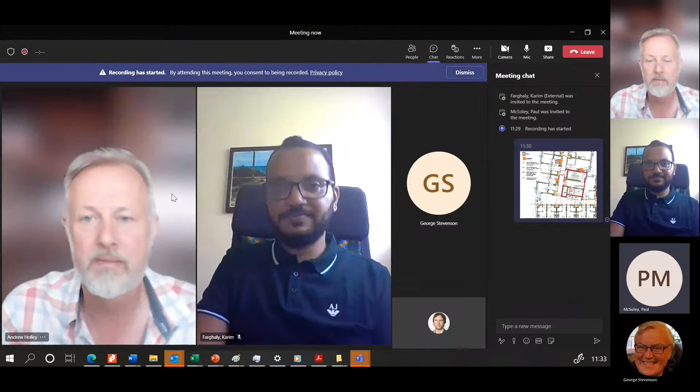Let's see if I can share my screen now, mate. Hold on, share out, screen 2. Okay, is that up? Yeah, I can see that now. Is it big enough on yours? Close the chat bit and have that instead. That's better, that's it, yeah. Otherwise, you can use your mouse controls to zoom in. If you use the scroll button and press control, you can zoom things in and out.

I can't make that any bigger because I've got a 50-inch TV. I've got a massive TV, but how big it is on your laptop, so not that big. The problem is you get pictures of people. Actually, if you get rid of the recording bar at the top, dismiss that, that makes everything a little bit bigger. Anyway, it's just about legible at this size for me.

I'm sorry about that, mate, I had to take a call there from my neighbour, so I apologise, he's a bit older than me. We've got people waiting in the lobby as well, they'll be coming in. Is that Debbie just arrived? Yeah, okay, yeah, it is. Sorry, I had to dash and do something.

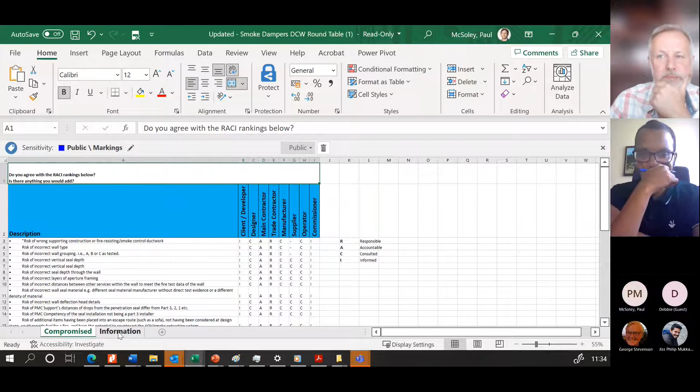No problems, mate. So George, you there? Yeah I am, okay, do you want what to do? The compromised all the information. No, ignore the compromise, that shouldn't have been in there. Yeah, no, that's fine, just the information. Okay, no problems at all.

So we're going to do smoke control, right? Smoke control dampers, not fire dampers, George, smoke control dampers, yeah? Or do you want to cover both? No, smoke control. Okay, so smoke control. So we're talking about this shaft, yeah? And I don't know if you remember from digital construction, what we said is that it's not going to be a natural shaft, it's going to be a mechanical shaft, right? This is what we're going to base it on, right?

So the first thing is, obviously, when you look at it, you say okay, so what is the material, what is the type? So who specifies the material of the smoke control system that sits in there, the dampers? Client, designer, main contractor, trade, manufacturer, supplier, operator. Do we tick all the ones that are relevant, George, or just the one who should be ultimately responsible? No, I think all of the ones who are likely to be providing it, that would be my suggestion. Yeah, for that reason. So, okay, so the type of system should be the designer. All agree with that?

Yeah, I mean, I don't know, but just so we know we haven't got a lot of time - is everyone familiar with what a smoke control damper is specified against? If you're not, I can show you in two seconds. I'm not, but I can find out.

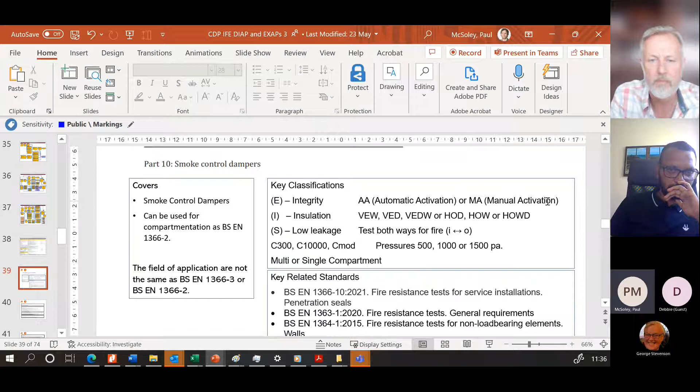So it's either an AA or an MA system. One has got an override control, so you can go automatic first and override it, or one's automatic only - no override control in any shape or fashion. They're tested both ways, fire inside, fire out, because the damper's asymmetrical. They're tested for either 300 cycles as a lifetime operation, 10,000 or Cmod, and they've got to withstand pressures of 500, 1,000 or 1,500 PA, and they can be for a single or multiple compartment system.

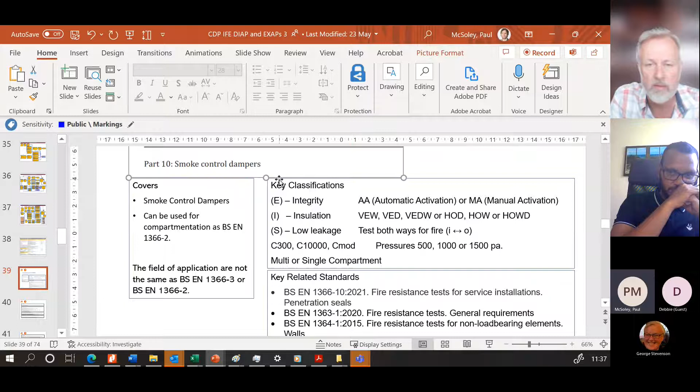So what I'm going to do is copy that page out - that's okay with you, George? I will distribute this around. This is training that I do externally. I'm going to paste that just here, so we've got that as well, okay?

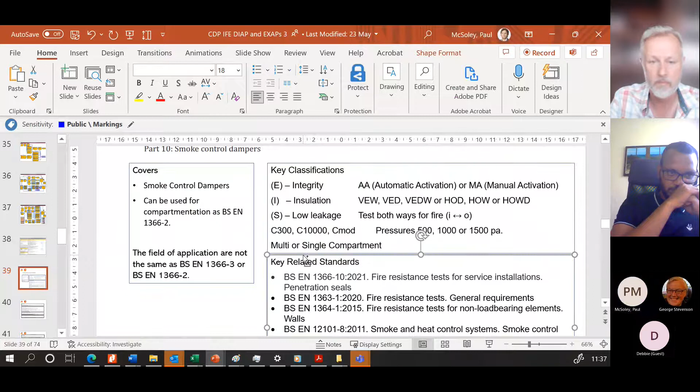What I will copy into here as well, just so we've got it, is also this part. Debbie, you'll get this, and it's good to have - I'll send you through some stuff earlier as well, you'll see it come in. I'll send you through the IFE stuff that I do for them as well.

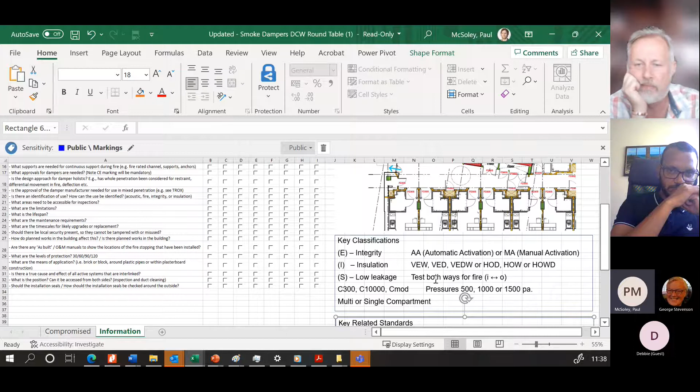So the first thing is the type of system. Who should be specifying whether it's AA or MA? Who should be saying whether it's vertically mountable in a wall, vertically mountable in a duct, or it can go duct to wall, or it can go in a floor - horizontal. Yeah, so you've got it, slightly different to dampers - there's some nuances between it all. Who should be saying it's single or multi-compartment? Who specifies the pressure, and who specifies all of this? This is what we're talking about.

So the basis of the type of material should be the designer, but also it's the main contractor, the same as this one here, but it's also the trade contractor that does it as well. The manufacturer shouldn't be specifying anything - they should just be giving you what you've asked for. Does that make sense? Right, because the bottom line is all the different manufacturers hold different levels of what's been tested.

But again, if you look at this particular system - this is the way I look at it, so don't shoot me down if you think I'm wrong, you might find this interesting, Debbie - I've got a multiple compartment building, so it should be a multiple compartment system. Prescription: it's going to go in a wall, so it should be VEW. It's a wall that's shown.

If it's got an override control on the floor, then it should be MA, not AA - it's got a fireman's override, right? It should be integrity, it should be low leakage rated S, because obviously you want to stop smoke going through the shaft to the other floor if there's a fan failure, etc.

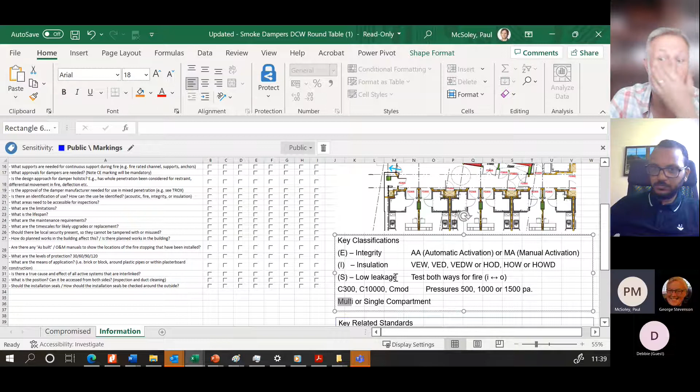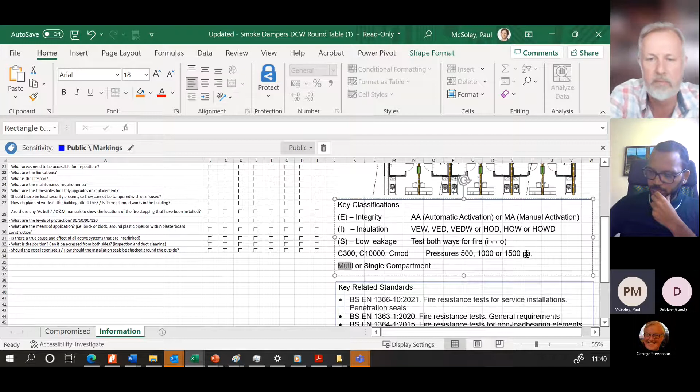And the first question is, this has been shown as 60 minutes and it's a 2-hour firefighting shaft. That should have been shown at 120. Because the problem is it's not...

Compartmentation, we're talking about smoke control. So the prescription shouldn't be compartmentation for drywall, it should be compartmentation for smoke control. And this is the bit that - I'm not going to say manufacturers because recorded - but it's when people are getting it wrong, massively wrong. Does that make sense to you, Debbie? Yeah.

As for the nuances, it seems to me that once we've got this kind of information, it's ideal to put into some kind of decision support app. Yes, that would be really good.

When you were talking earlier, Debbie, the big thing is - and this is just a crude diagram - if you look at these shafts, is that if it's mounted in the wall and there's no ductwork, then the wall's picking up the compartmentation of the floor, plus it's got to do the same performance as the duct. Because the duct's 500, 1500 or 1000 PA. The drywall can't do that. That's one of the big problems that's been going on, right?

So you can see the nuances of all the different arrangements you could have for such a shaft. You could have it compartmented at floor level and just have a duct and a false wall. Then you're looking at the duct and the damper, or you can have the wall doing it and no duct. Then it's just the compartmentation of the duct, so the floor up the building and how that interfaces. And that's the selection process that has to be prescriptively described at the start. That's where it's kind of going wrong, if you understand.

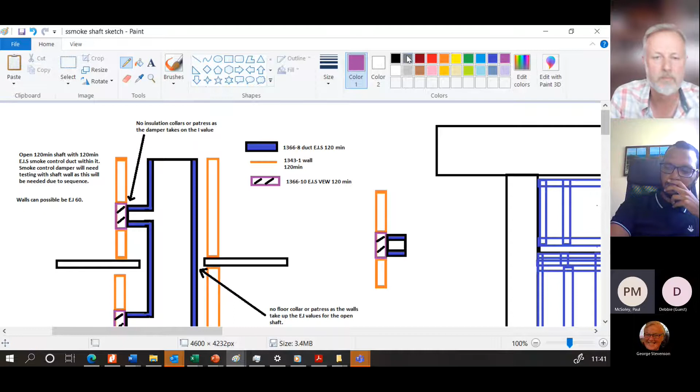Just to give you some food for thought, all right? So what is the movement of the structure and the services? That should be the designer that should be specifying that. And if it's design and build, then the main contractor still has responsibility for verifying the adequacy. And some of that will be trade contractor as well.

We'll get on to clients in a minute, Debbie, so I'll get your view on this.

So what service maintenance is required? Well, that will come from the designer and it will come from the manufacturer, and possibly maybe the supplier of it as well. That's my view, because the service of these things is subject to DW144 and 145 and how you clean ductwork, how you get access, how you change componentry, what the requirement is for serviceability, and obviously the supplier and the manufacturer are coherent in that, and so is the designer. And so probably the main contractor and the trade contractor are sucked into that as well, because it's a combination of all of them. The operator will just get the output of that.

Do you agree with that? Yeah, I'm going through this in logical steps in my own head. If you disagree with anything I'm saying, please tell me, right? I'm sure Paul White would disagree with me with some of these bits. I'm sure that's why it's always good to have him, because he's great. He's the key person for this, really.

What is the location? Coordinates? Well, that's going to come from... I've skipped one here, oh sorry, environmental exposure, sorry. That's the problem of having a 50-inch TV, Debbie, you miss things. So let's do the one above first.

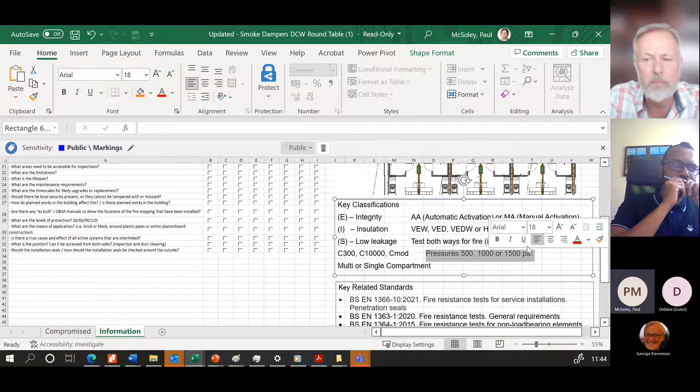What's the pressure resistance of what? If you look at this bit here, that's a summation of whatever's calculated in fluid dynamics terms. So if you've got a 0.8 shaft, pressure resistance. It's just the pressure resistance could be anything.

Yeah, no, you're right, environmental could actually mean anything. I'm not quite sure what the question means sometimes. What does that jargon mean when it's a non-jargony word like environmental? Do you mean the weather or what? I'm the same as you. Yeah, that's fine, that's exactly what I thought, Andrew. Oh no, it's because it's got this at the start.

I need to do that. You can paste it in the first time, but you need to add the little notch thing to cancel out the formula, speech marks, yeah.

What is the intended use? So what is the intended use inputs in regards to the selection of type? The intended use inputs will be again a combination of this, that.

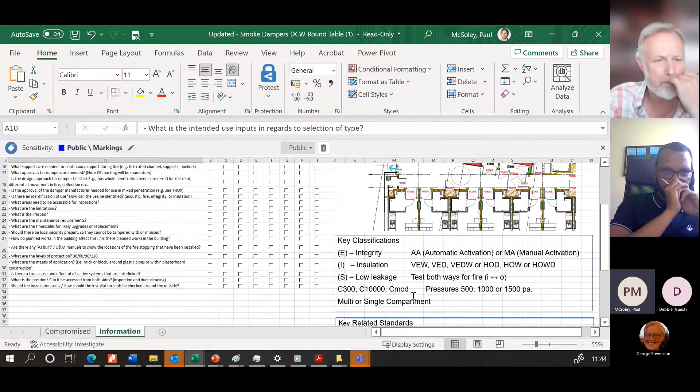That's got to come from the designer. The main contractor's still got some responsibility. The trade contractor, the manufacturer, and the supplier probably as well, and actually be the manufacturer. This is how I would see it.

What has been installed by whom and when? That will come by that one, and probably the supplier, because the manufacturer is the manufacturer.

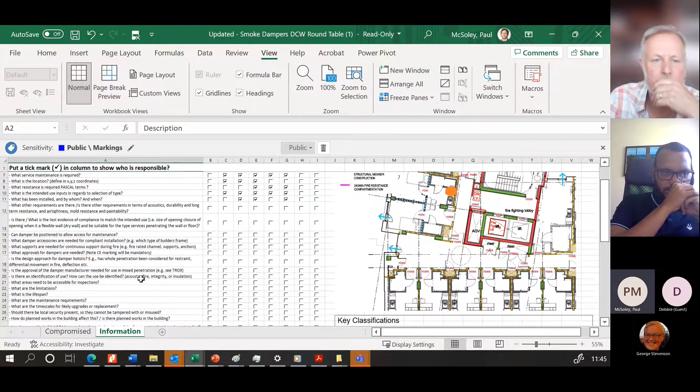So what other requirements are there? Is there requirements in terms of acoustic, durability, long-term resistance, air tightness? Yes, that's got to come from the designer, the main contractor, the supplier, and the trade contractor. Not the manufacturer, because when you buy a damper from a manufacturer, they just tell you what it could perform to.

So they're not going to calculate the resistance. No, I suppose you could choose. They would deliver it, but the designer would choose which one they do because they have many acoustic versions or something. Is that correct?

Because the big thing I'm trying to preach externally, and it's good to hear Debbie say this all the time - we don't talk enough at the moment because we're all so busy - it's about getting this prescription right. What is it? What am I? What is my intended purpose? Am I appropriate? Does that make sense?

So what is the test evidence of compliance to match the intended use? Size of opening, closure, opening. So again, suitable for the services penetrating the wall or floor. The designer should be able to give you some information. The main contractor's definitely got some responsibility. It's the trade contractor and the suppliers that also have to do it.

Because again, this is about VEW, VED. So the bottom line is, just because something is CE marked under CPR doesn't mean you can put it where you want. Does that make sense? Yeah, it's about appropriateness. Big word, appropriateness, I love that word.

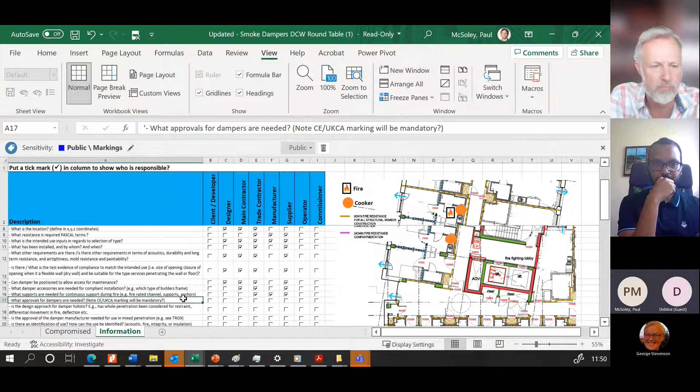So why have we even got the phrase saying that it would be mandatory? Because in some circumstances it's not appropriate.

I think this is the whole nuance about what's happening with Regulation 7. I'm not sure what's happening with that. So the approvals for the dampers will come from the supplier, the manufacturer, the trade contractor, and ultimately we need to make sure it's correct as the main contractor.

What about the commissioner? Would they check? Would that be part of that final sign off? Because if a CE mark is a complete product, including the installation of it, who's going to sign off that it's CE approved as a complete installation? Well, if that sort of thing.

No, you're right, Andrew. This is the issue with the current thing, is that this word fire stopping is a nuance, and it's actually rubbish, tosh you could say, because fire stopping contractors deal with part 3 and part 4. We're talking about part 10 now, and we're talking about drywall. We're talking about part 10, and generally there's no passive fire materials in a part 10 installation.

There's very few in fire dampers as well. Generally it's patress plates or gypsum plasters and stuff like that. There are some batts, but that's about the only method there is that involves passive fire materials. So this is about the appropriateness of the whole installation.

Who's responsible for making sure it's correct? Well, ultimately, in my view, it would be the lead consultant, and the lead consultant is the person that instructs the design team on the work they're undertaking, which could be the main principal contractor in D&B, or it could be the client or the client's appointed manager in a traditional form of contract.

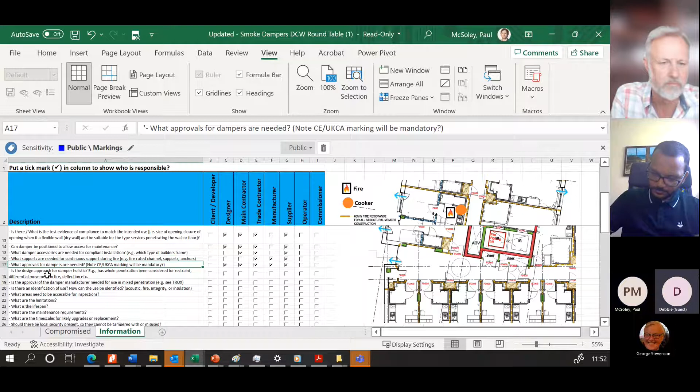I don't know if you know that word, lead consultant, Deb. It's one of my biggest bugbears. It's the person that instructs the design team. Yeah, I mean, also there's separating out who's responsible for things and then who's ultimately accountable. Yes, those are two different things, but related. Yeah, absolutely perfect, love it.

Is the design approach for the damper holistic? Has the whole penetration been considered for restraint, differential movement, and deflection?

So this is the hard bit. So it could be that one, it could actually be that one, designer, isn't it, and it could be that one. Definitely, and I think this is the bit I've had these conversations so many times now, Debbie, as well, and Andrew.

Is that you have to treat post-Grenfell by contract type as well. I don't think there's any other way you can generically do it, because ultimately a client wants to get rid of their risk on a race to the bottom, so to say it, and expect the quality they should get on a non-race to the bottom scenario.

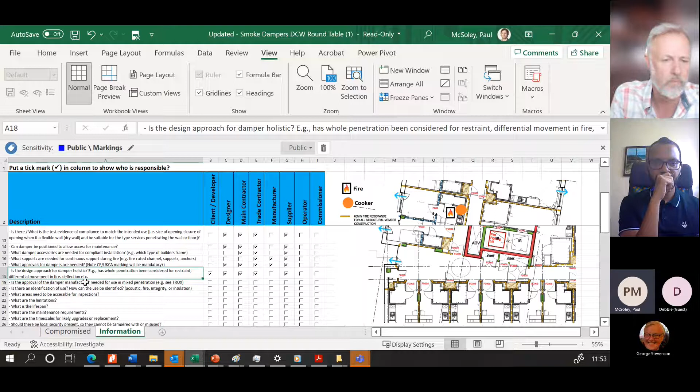So you've got to look at it that it could be any one of these three, but ultimately the trade contractor's got to check it. If there's a supplier, the supplier's going to be sucked into it. The manufacturer's just telling you how their stuff works. That's how I would look at it.

Is the approval of the damper manufacturer needed for the use in mixed penetration?

Because the fact is that should come from the designer, the main contractor, and the trade contractor. But the fact is, he's saying see TROX, right? The bottom line is there's now an EXAP for putting fire dampers in multi-service, but there's no EXAP for smoke control. Essentially, you can't do it.

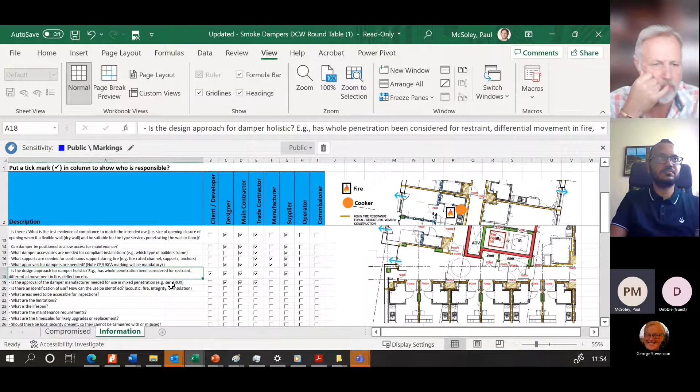I need to put on there, I think, for George to say you can't do this with smoke control. If I was Paul, I'm sure he would say this. You cannot.

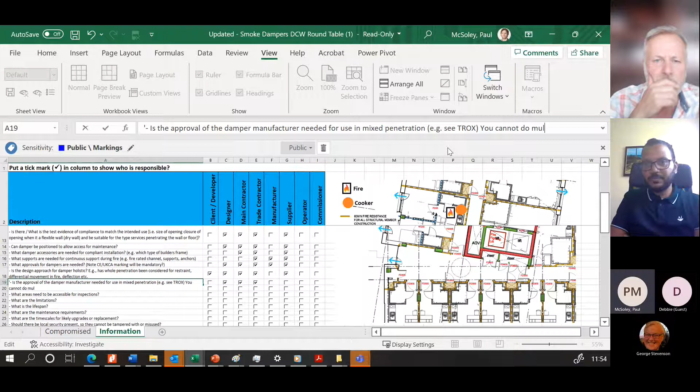Okay, can I ask a question here please? Go, mate. Shouldn't we have, because all the questions show that there's someone responsible for this and someone is accountable for this who would say yes and no. Shouldn't we have different tick based on this?

I think you're right, because there's the RACI thing as well, which I think was that that's the RACI there, right? So ignore that for the minute. I think we're going to tackle that last.

Okay, because I think the thing said at the start of this is that smoke control in its own right is so complicated, because if you take our careers - I'm only 42, to be honest with you. I know you're obviously all a lot younger than me, right?

Just having the crack here with this one - is that what we've all been doing since regulatory reform, when building control no longer did fire certs? And actually they're not a designer, they're not a financially interested person, they don't have the ability to sign off installation details, because it's all about what's been tested. Before, past experience would be, I've tested this and actually I know it works, and here's the information. So it all still comes back down to the information that's appropriate to what you're doing.

Ever since then, we've been in a situation where architects can't really design walls because it's about the manufacturer's information and how the trade contractor forms it to form apertures, etc. And it's the same for all the other subjects that are there: dampers, ducts, doors. All they should be is the coordinator of bringing it all together.

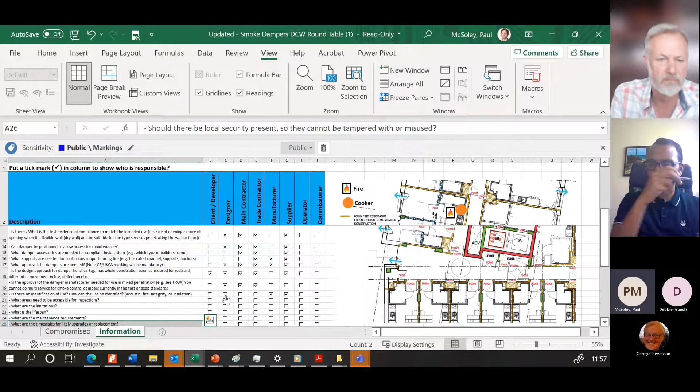And maybe the designer's got an initial one to say this is what it should be. The problem is you could say all of them, but it depends again on the contract type. I don't think there's a right or wrong to this. Contractor, I think you're right on that. Yeah, yeah, so you say then?

So Andrew's the main contractor. Well, not the main contractor, actually - everyone else tells them to, which is what's wrong, as you just said. That's what used to happen.

Actually, the main contractor went, 'I'll tell you what you need is one of these, mate. It will do. Here's a sketch. I've got one of these at home, I'll bring it in.' Bish bash bosh, that'll do.

How many times have I been to a contractor and I go, 'What is this and why is it there?' And they go, 'Oh, my mate who does the fire alarms, he reckons you need one of them.' That's the design - got to stop.

What are the needs for access to, what are the needs to be accessible for inspections? That will come from the supplier, from them, and it should come from the designer as well, and probably the trade contractor. What are the limitations? Well, that will probably come from the supplier, the manufacturer.

What is the lifespan with these two, I reckon? What are the maintenance requirements? Well, there should be something from the designer, because they should be saying if it's 145, whatever applies to it - though a lot of it's locked up in building regs now anyway. The manufacturer and the supplier, and probably the trade contractor as well.

Because other stuff's involved - I mean, just to not miss it out, we haven't really used the client developer much, but actually, in my experience, the ERs from the client sometimes will say, 'Well, the designer says we can have it or you don't, which one do you want?' And then the client would say, 'Well, actually, no, we want that because we know we need it.'

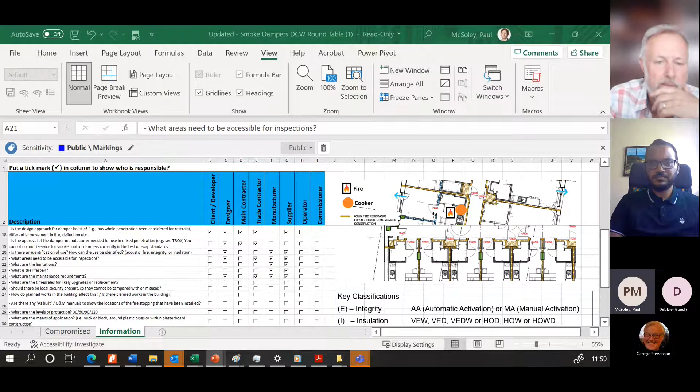Yeah, what I just sent through to Debbie, I'll get George to distribute this. Was this right? Because I think what we're talking about is there's 4 things - this is just in my experience again, so please shoot me down if you think I'm wrong, anyone.

Right, JCT always has in it, in a shape or fashion or a form, the 3 things: discrepancy, adequacy, and statutory requirements. Statutory requirements will rule all. Adequacy will rule discrepancy. But if it's adequate, but it's not statutory compliant, that will change the requirement of adequacy. So this is basically what we're talking about, aren't we?

So if you've got an ER that says all the dampers in the building are part 2 for smoke control, then it's inadequate - for statutory compliance, it needs to be part 10. It matters not what's in the ER and design and build. You just got to go away and do it.

And this is why I think - I've said this so many times now - you have to schedule out contracts in simple forms and say it's design and build, that the contractors are really responsible for the adequacy of it with a design team, or it's traditional where the client and their design team's responsible for it and the contractor's just delivering it. And that's the 2 you've got to break it out by, whether it's a client responsibility or whether it's a contractor responsibility, one or the other. And it depends on the form of contract.

And that's what I think the hard thing's going to be, you know. And schedule 1 is always how you basically manage change process. So, you know, what are the timescales likely for upgrade? And we'll talk about this client thing at the end - I want a bit of a debate on it because it'd be good to get everyone's views.

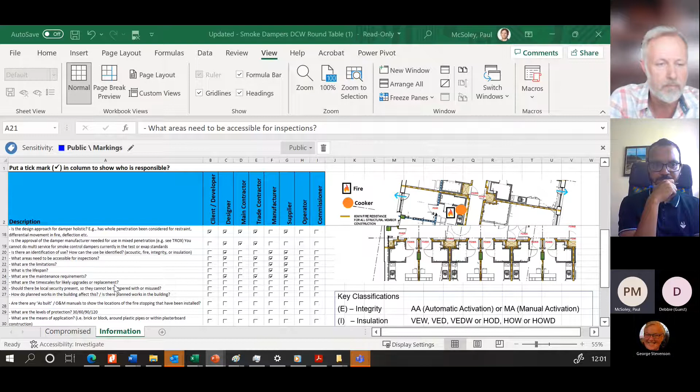Because I openly say that what's wrong with the industry is the way that clients appoint maybe a development manager, they go to the cheapest PQS, the cheapest design team, everything. Then it goes to a contractor under a single stage engagement, and the building's ill designed, ill thought through, and the body's too big for the skin. But that's just how I've seen it - for too long. I agree with that.

So what are the timescales likely for upgrades or replacement? That will come from them and the supplier. There may be something that's in the contract, as you say, there from the client about it. What is the time - they might say you must be able to turn this around in so many weeks. So that could be a combination actually of all of this. Should there be local security present? With the same thinking, wouldn't we say that about the lifespan?

So if you've got a system running for general ventilation and smoke, doing three positions - closed, general, and smoke - you need a damper that's probably gone through 20,000 oscillations to get a lifespan over 25 years. Does that make sense? Because that's whether you want to pay up front for a better system that has a longer life.

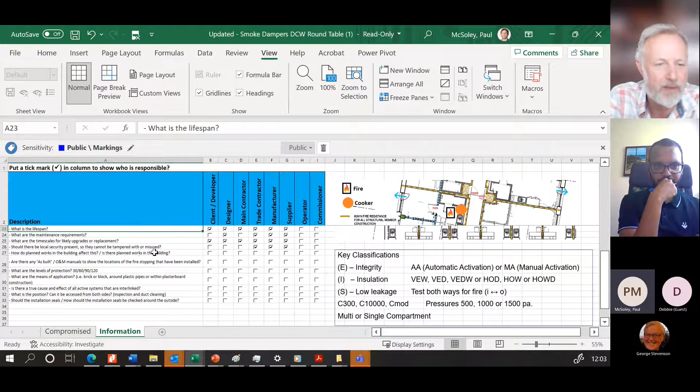How do planned works in the building affect this? Is there planned works in the building? How does it affect this? Is there planned works in the building? Or is there works in the building?

Well, I'm not sure about that one. Are there any as-built / O&M manuals to show the location of the fire stopping that have been installed? Well, there will be, and that will come from probably the main contractor, the trade contractor, and the supplier will combine to do that. Commissioner as well? Would the commissioner certify that it had been done? Because they usually sometimes tie it in with the O&M manual, because an O&M manual has - has it been commissioned properly is one of the first questions you get.

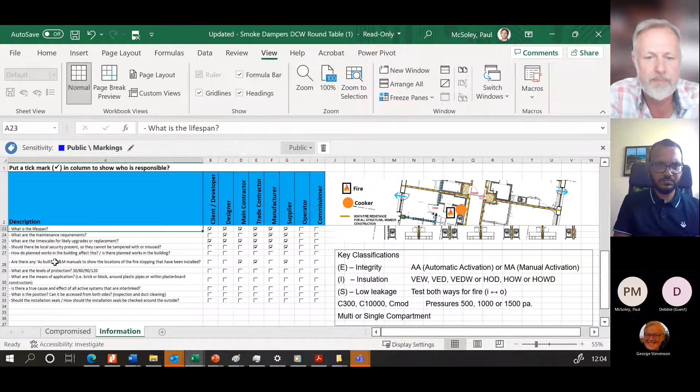Let's just show - this is about locations of fire stopping only. Location, though, yeah. Depends what the commissioner does - will it be the fire? They're a bit of a clerk of works as well, you know. But I'd say, yeah, mainly trade contractor. Okay, let's have a look at this bit in a minute as well.

What are the means of application? Brick, block, plastic - you missed one. So the level of protection - that will come from the designer, the trade contractor. That will just come from the designer. Of course, yeah, should be preset. And it could be them actually as well, and design and build - I'm going to put them both down.

What are the means of application? Brick, block, around plastic, or even plastic. Okay, so it's brick or block or standard supporting construction. That information will come from - it should come from the designer. The main contractor's complicit, so's the trade contractor, and so's the supplier. Because it's VEW - is it VEW in the standard supporting construction? There's only two types: plasterboard or brick and block.

This is linked to appropriateness. So is there a true cause and effect of all active systems that are interlinked? Well, it comes from the trade contractor. It could come from the designer, and it can come from the main contractor and the supplier, all linked together.

What is the position? Can it be accessed from both sides? Okay, again, this is a big one. It is the designer - should be looking at this, the main contractor, the trade contractor, and the supplier, because all seals - there's only one on the market in dampers I know about, which is fire dampers, not smoke control dampers, which is one-sided for access for installation. But you still need access both sides for cleaning. Should the installation seals be checked around the outside? That'll be the trade contractor, the main contractor, and the supplier.

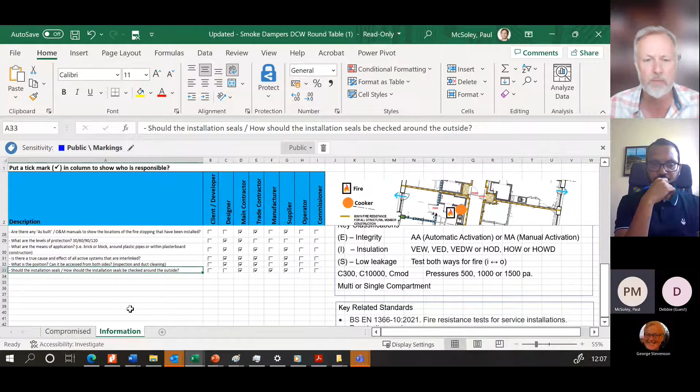Is the one you highlighted about existing buildings? I think this is an operator thing. How do the works in the building affect this? Is there planned works in the building? I think how that's affected probably comes from the supplier and probably the operator.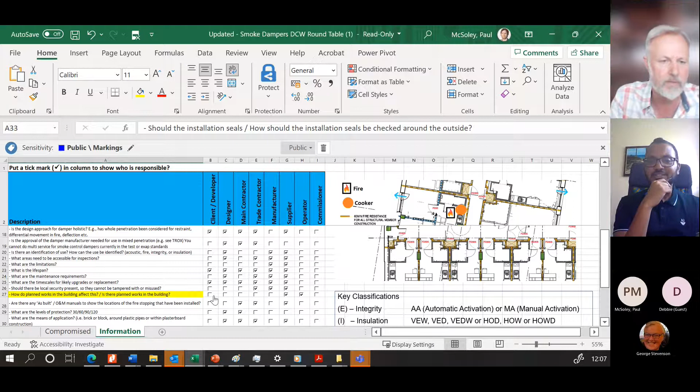And the client? The client's work might. Yeah, the client as well, because it depends - they would set up where they could choose timing, for instance.

If I ever see a management strategy at the start of a job, I'll eat my boots. I'm telling you, it's the last thing that ever gets issued is a management plan. It's probably the most important thing.

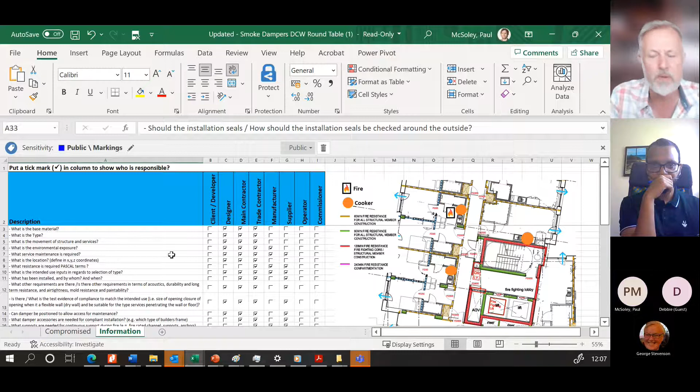Let's just have a quick look back at client. If you were doing a design and build job, the client will give ERs, as you say, but the question is whether they're responsible. Well, they're not responsible for - say this is my preference, because the adequacy goes down the line, doesn't it?

Yeah, it's as to whether or not they're technically responsible. I think the client one, I think you need to sort of discuss - it's not right or wrong. So we'll go back into a group in about 5-6 minutes. I think it's a case of how do you say...

Well, say it's only when there are - if you think of it the other way around, when we finished or whatever, and someone said who chose this, and the designer said well it was the client's choice, the client asked for that - then you'd say they're responsible for choosing that. Whereas in other items, the client might ask for it, but then the designer should say no, you can't have that because it's not to standard. But if there are options, then the client might say, like we said about lifespan, you can say it's an option they can choose. It's about money, in other words, rather than there being only one right way to do it.

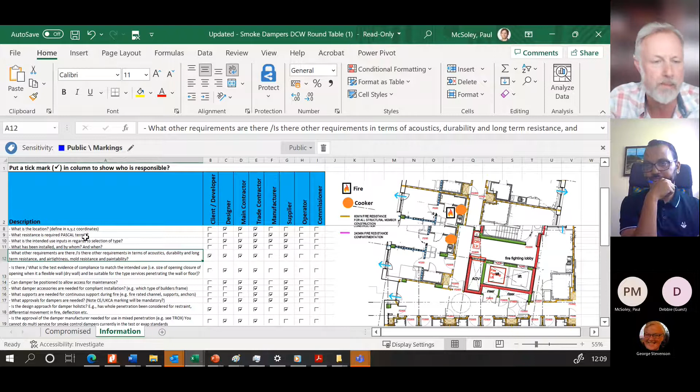Yeah, so things like that could be because it's about paintability. Is there any test that wouldn't be the client? See, isn't that a choice thing? This one, what, this one here - can the damper be positioned to allow access for maintenance? Well, that's basically the thing, isn't it.

That's a designer making sure it does happen, isn't it - not an optional thing. There are strict codes about how you're supposed to do it, because you've got DW144/145 that tells you you've got to be able to get at and maintain the damper, clean it, maintain it, check it yearly - even if it's motorized, you still got to check it yearly, because you've got to get all the crap off the blades, everything, you know.

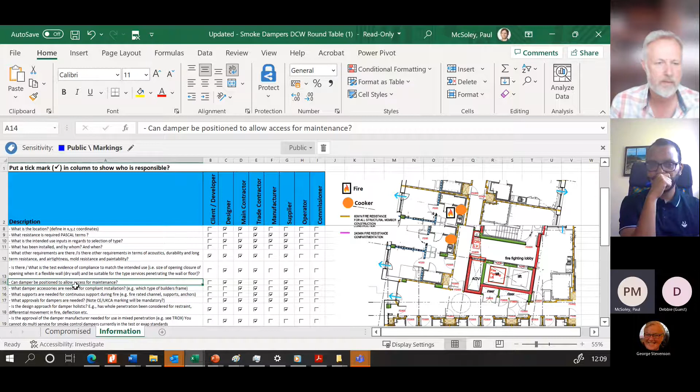What damper accessories are needed - that wouldn't be the client. That wouldn't be the client. But just looking at stuff here, even for maintenance, it won't be the operator, because that will come from us. The operator may be involved, but at the end, I think we need to just clarify a bit with George how we want to tackle those ones.

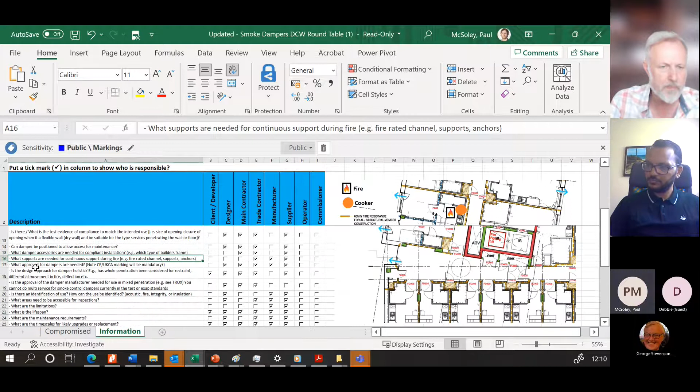What I'm always conscious of is how people receive it if you give them the stuff. Because if you put it in there with the operator, the project managers get everyone in a room - that's all they'll do, do you know what I mean?

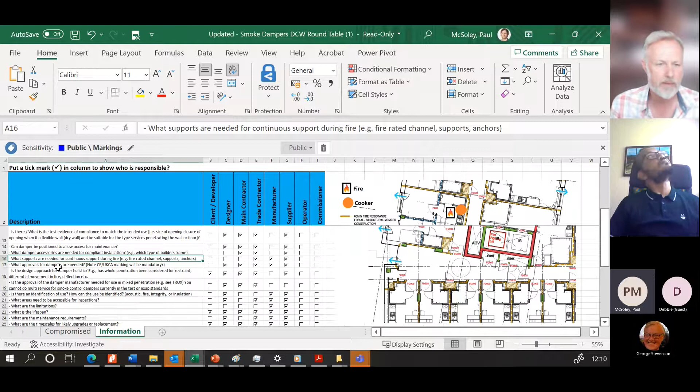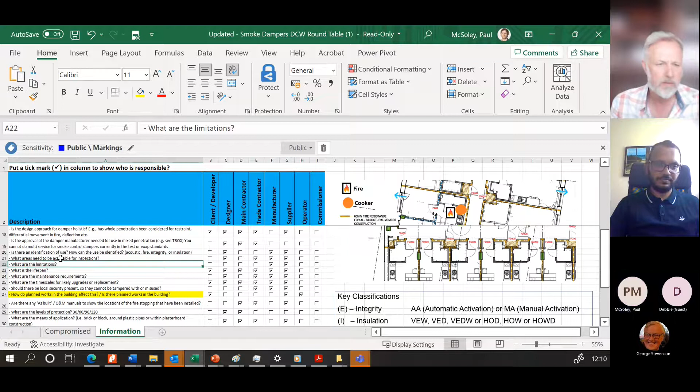So what approvals are needed? That won't come from the client, it will come from the designer. Here's a manufacturer's use, but it's an indication of how to use it - limitations, lifespan. So limitations, any access - that comes from them.

Even the main contractor is probably part of that as well. I'm going to keep it as that.

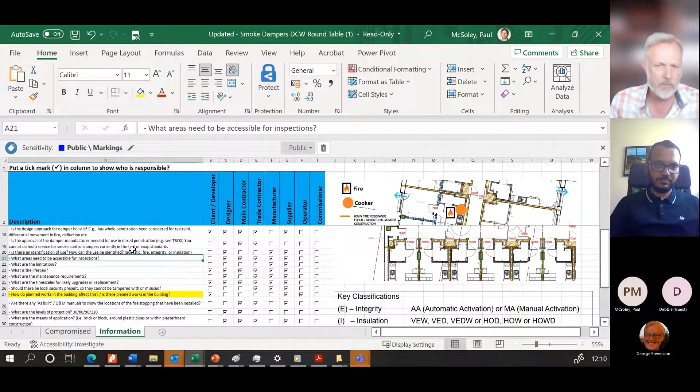I've noticed we haven't really given anything to the commissioner yet. What do we employ them for if we don't? Well, the only thing they check on this is volumes and performance of the system. Who checks that the system performs? Yeah, that's it - has it been installed correctly? Those types of questions, aren't there?

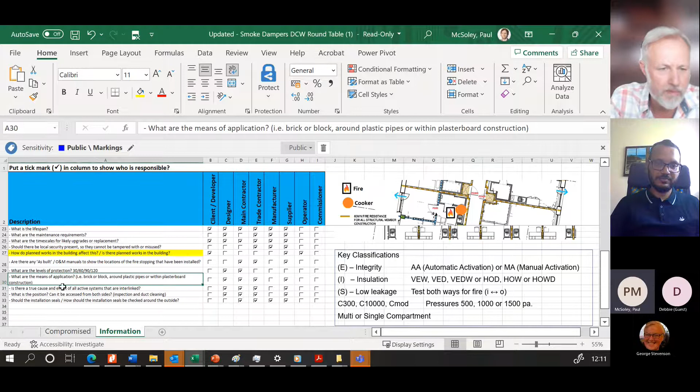Should be one on here about... I'm going to put on here about... Well, actually, cause and effect is probably a good one. Yeah, I'm going to say true cause and effect, because it says true cause and effect. So that would involve the commissioner, yeah, and probably the operator as well.

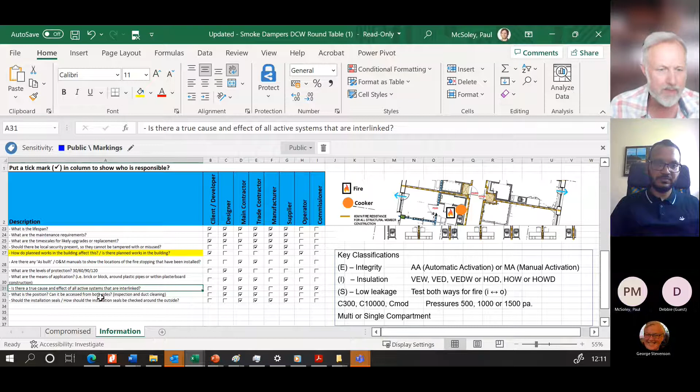Can it be accessed? What is the position? I don't quite understand what it means. Can it be accessed from both sides? If it's in the wall, if you've got it in a riser, which is a shaft wall, and you can't get on the inside of the riser, then you can't look at it from both sides. You can't inspect it. You can't even install the seal.

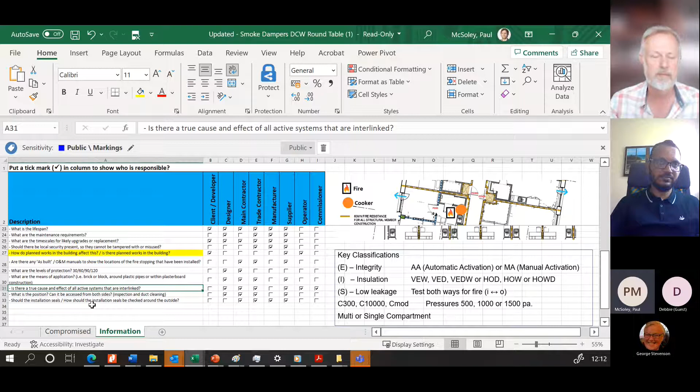Lots of jobs at the moment where the body's too big for the skin. If you've got ductwork in a riser and you've got a damper coming out of it - forget smoke control, it's a normal damper - and you've got a gap anything under 450 mil, you're not installing the seal on the inside. You ain't going to be able to do it. You'll never do it with any quality. You've got to get in there to do it.

So what is the position? I think the question here is probably one about how all the commissioner does is go out and verify a volume that a designer said should be there. And the designer could initially be saying, you have a good practice company, someone like Hilson's, wherever they've gone, this is the type of system. You've gone to Fire Protection, another great company, they've done all of that. They've selected, say, a Mandík or a different damper that goes on the end, or a Trox, whatever. The volume should be 10 air changes and it equates to this flow rate, and it should be in zone B. They'll just go and check that.

All their ones should be closed. That's all they're going to verify, and say, yep, I've got it within 100 to 105% duty, I'm happy, job done. That's all they'll be doing. Do you agree with that, everyone? Yeah.

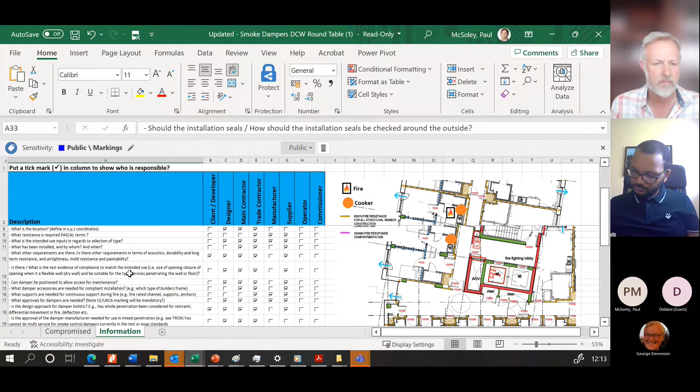So I think the big thing here is about clients, and if it's design and build, a lot of these main contractors are going to turn it over to the client, developer, whoever's responsible for the contract and the trades. I think the operator's involved with stuff, but it's not about who's responsible, because they're not responsible. They're responsible for that planned working, and so the supplier should give advice to the client. Actually, the rest of it is a hard one because it could be all of them.

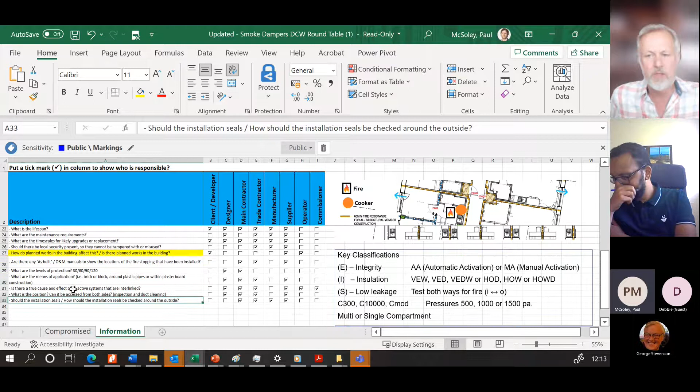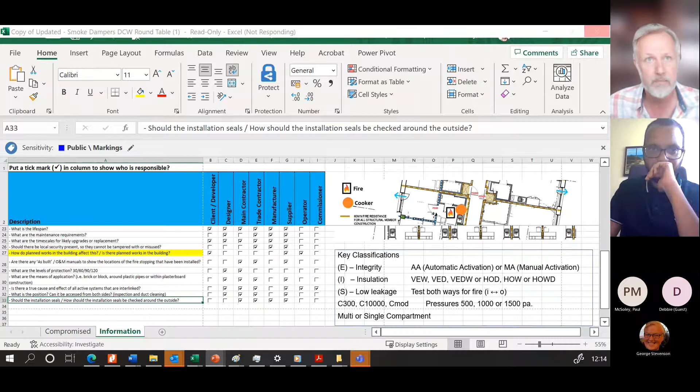It was interesting - I was in a CPD training on contracts, and what he was saying was that what often goes wrong when contracts go wrong is because the responsibility hasn't been correctly allocated to the person who can control that. If you give control, financial responsibility, to the person who actually can't do much about it, then that's when it all goes wrong. So if the client says, oh, I want this, but it's a load of rubbish, well, that doesn't really help - they're not the person who can actually deliver it. So it's about who delivers it as well as who makes the changes that make the difference.

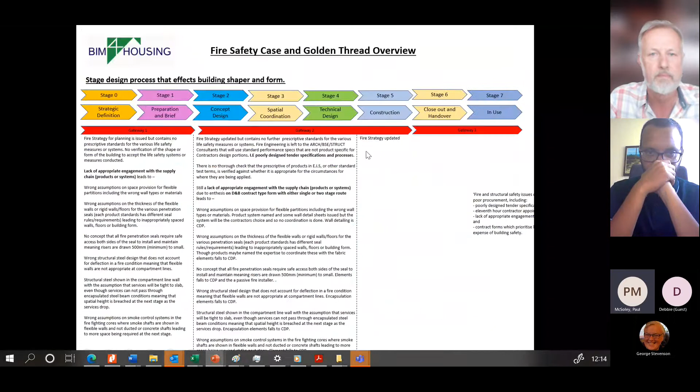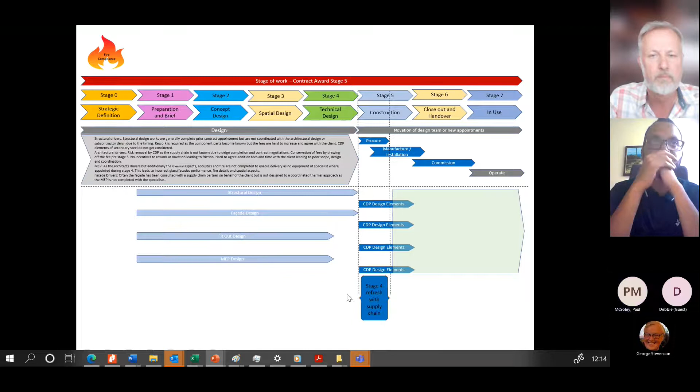What you should have is this is what we're traditionally doing with procurement, but all this specific kit and product doesn't exist until the CDP came on board. So you can't really do that under the... Well, you can do it under the Gateway 2 system, but God, I won't be involved in that job when you're going through all the major changes because it doesn't work.

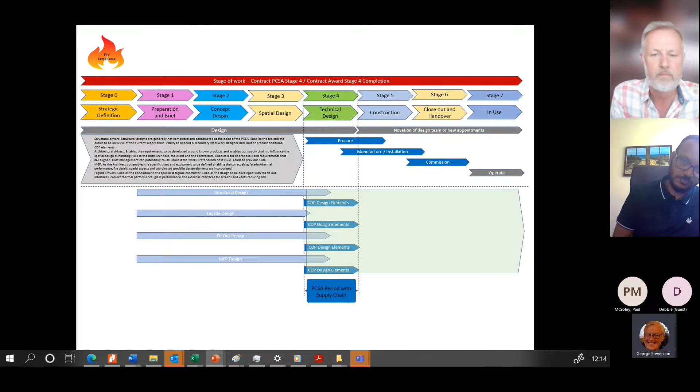Paul, we need to rejoin the main group. We're done, George. Anyway, the only question was, we just close this down. Really, it's that this and this would depend on whether it's a traditional form of contract or design and build. That's the only two things to bear in mind.

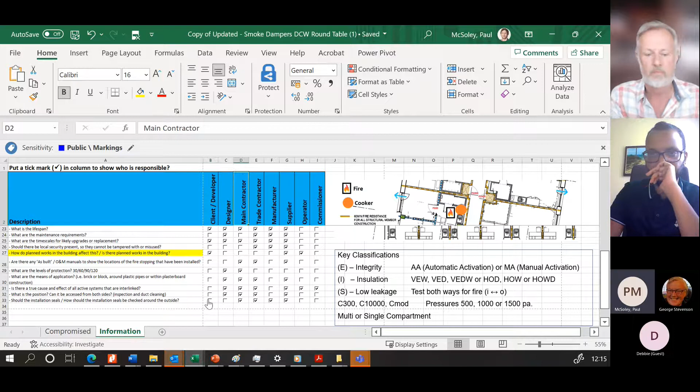All right, good, okay, we can talk about that. Yeah, we'll bring it into the group now. I'm switching over now, George. Okay, okay, cheers, cheers buddy. Take care, see you in a second, guys. Yeah.